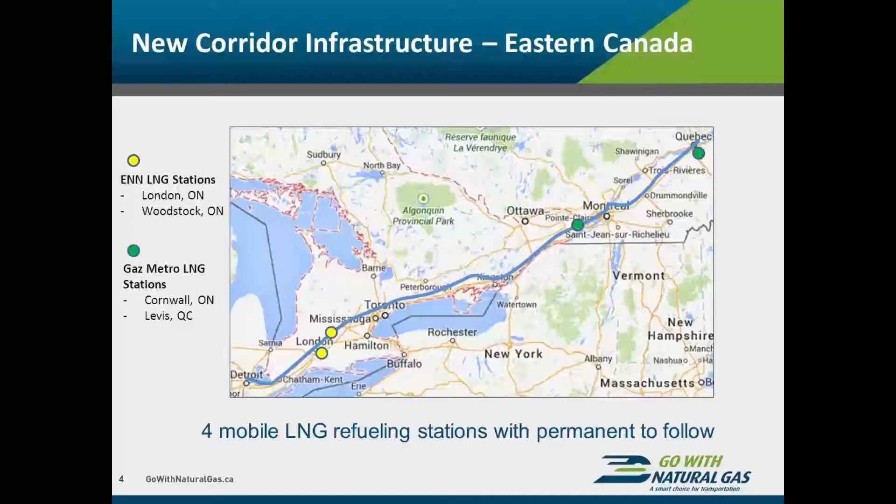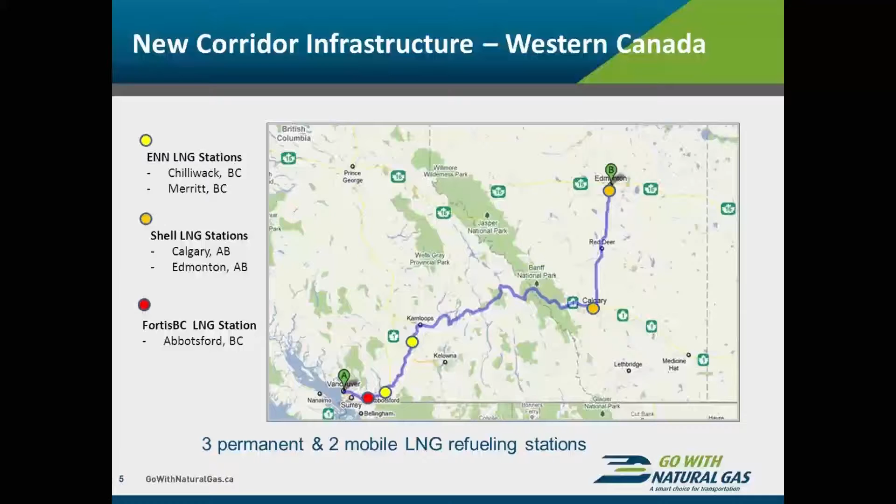More will be coming. And now moving on to western Canada, Vancouver to Edmonton, and potentially on to Fort McMurray. There are 5 stations at this point in time, a combination between permanent and mobile. Again, none of this infrastructure existed 2.5 years ago, so very exciting times. We're just at the beginning, and this is all private money going in to get this going in the market in Canada. Okay, so with that, that's just a little snapshot on what's actually going on in the market here.

For the presentation, I'm going to take you through why we're seeing this interest in Canada. Canada was an early adopter in this area going back to the 80s and 90s. Why is it coming back? Then I'll get into what are the engines and the vehicles available if you want to go in this direction, and then dive deeper on the 3 segments where we're seeing most of the activity: transit, refuse, and the highway tractor segment. We'll look at some broad adoption indicators there and also get into 3 specific fleet profiles and some of the numbers to look at the business case for those opportunities.

And then finally, I'm just going to wrap up to talk about what are some of the other elements that we're doing to really improve the system so that when fleets want to switch to natural gas, everything is ready for them to go. Once they've verified that business case, everything else is in place to help them.

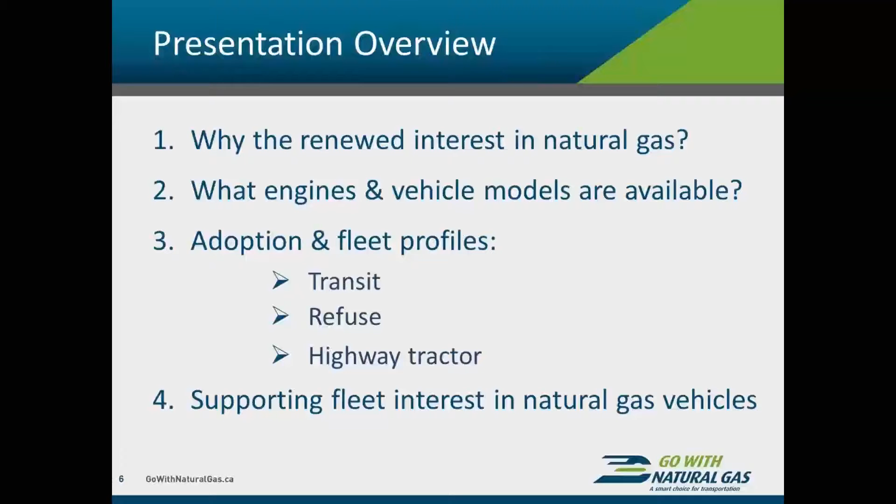So now getting into it, you've already seen this, so I'm just going to go on. I should mention that, yeah, I work for the National Trade Association here in Canada.

Okay, so let's go right to the heart of the matter here. Why has natural gas come back? Well, I think everybody probably knows this. The fundamental reason is supply. In North America, we now have more than 100 years of supply.

Demand for natural gas is the other important part of the equation. Demand in traditional markets is pretty steady, maybe a little bit of growth. The only high growth area for natural gas use in Canada is oil sands. And Canada is exporting less and less natural gas to the U.S. because the U.S. also has a tremendous natural gas resource base.

So this is a real challenge. Where is the resource going to go? There are three options here: power generation in Canada, export to Asia, and transportation. So that's an important driver, and important to understand too when we look at government interest and the increasing interest in that regard. So the resource part is critical.

Another critical part, though, is the affordability of natural gas. It's important to understand how to do the basic math. A barrel of oil has just under 6 million BTU of natural gas, 5.8 as you see in the slide here, and a barrel of oil today sells for about $93. The equivalent amount of energy when it's natural gas sells for only $23. So that's on a commodity-to-commodity basis.

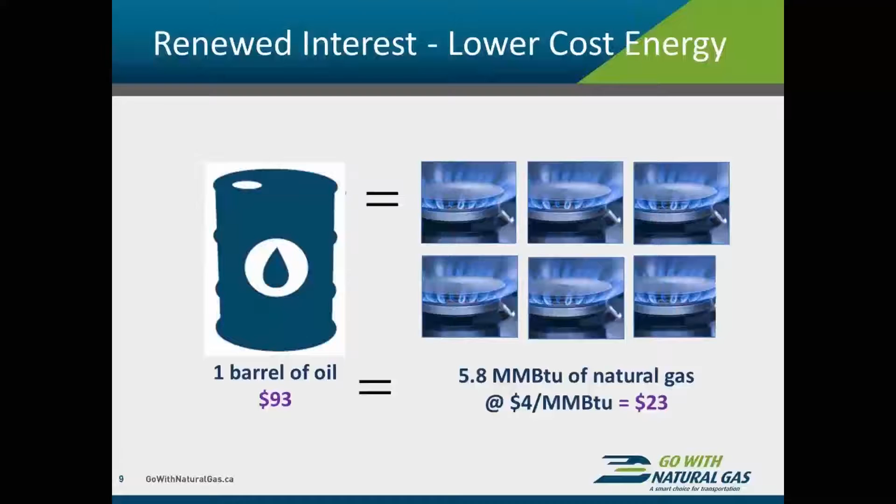But as you can appreciate, that's a very moderate price point for natural gas. And because of the resource base we're looking at, most analysts are projecting moderate pricing for natural gas looking ahead. So this is quite an exciting opportunity in North America.

The other interest for policymakers is around GHG, or carbon emissions reductions. This slide just shows for a highway tractor, what if you go to single wide tires, improve the aerodynamics, and train drivers to operate those vehicles more effectively. How do all these options compare to alternate fuels?

You see here B5, 5% biodiesel, that's the purple bar. And then you see compressed and liquefied natural gas. Well, big potential when you start to fold natural gas into the mix.

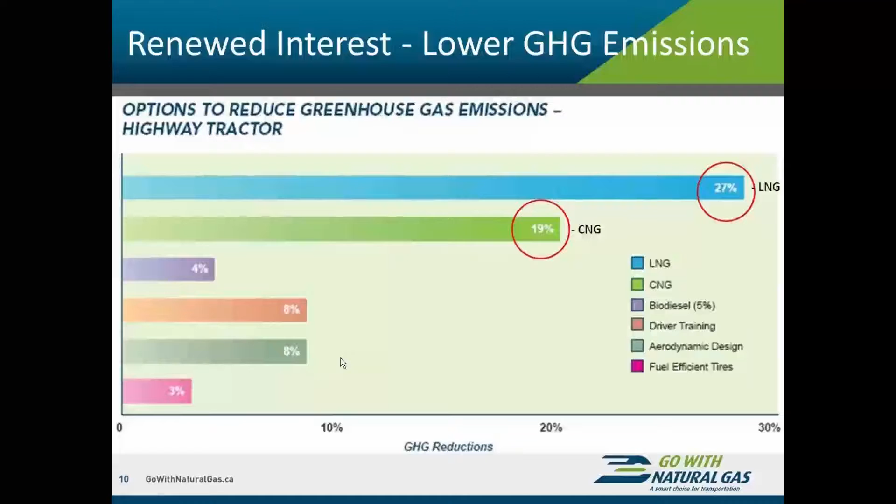And of course now Canada is harmonized with the U.S. on vehicle regulations, and we now have vehicle regulations for light and heavy that are greenhouse gas based. So as we see those regulations start to filter more and more into what vehicles the manufacturers are producing, this potentially could be another important support to make more natural gas vehicles available in the North American market.

Finally, on renewed interest is absolutely the improvement in technology. The nice thing about having a past, having some history, is that we've had time to come up the curve. We've had more than 30 years. The current engine technology for the medium and heavy truck and bus is 4th generation technology.

There's been significant improvement on fuel consumption, on power, on torque, as well as on related systems like integrated fuel systems that go onto the vehicle. And in addition, on refueling stations, tremendous improvement in the technologies here. So that's the other nice thing now about all that history. We're now really reaping the dividends in the market, and that's great news for fleets in terms of effectiveness of these technologies and the affordability of the technologies.

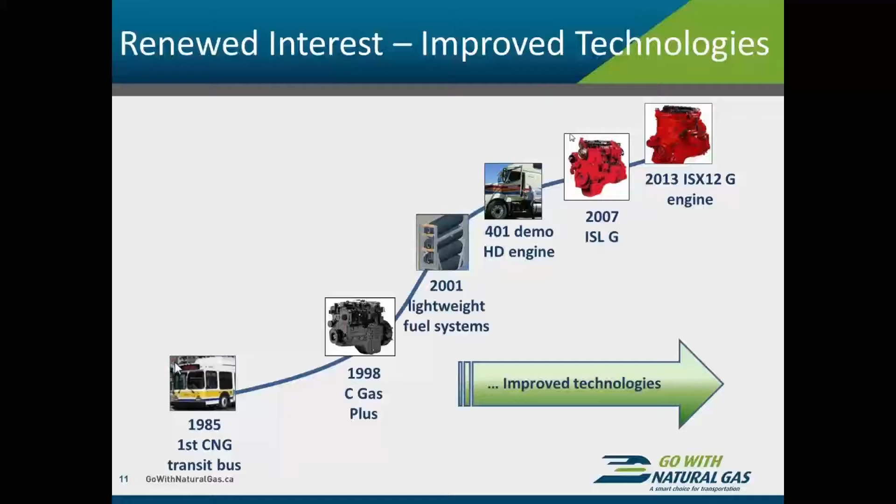Okay, I'm now going to transition into what's available and just very quickly highlight this. I think as there's been a number of changes in the engine space, so I did want to just go through this slide. You see the two engines in the upper left.

These are the current available engines from Cummins Westport. So the dedicated natural gas engines operate on CNG or LNG, the 9-liter ISL G on the left, and then the 12-liter ISX12 G. You see the horsepower range, so that takes us up to 400 horsepower, and at present that is what is available for the factory-built vehicles.

Now the good news is we do have a new product coming to the market from Volvo, and my understanding is they're going to start to take orders later this year, and that will get us above the 400 horsepower up to, I guess it's about 450, I think is what Volvo is saying here.

That's really helpful. And the other thing coming is the smaller natural gas engine, not till 2015 from Cummins Westport, but the 6.7 will be coming as well. So as with anything, it takes time to start to fill in these gaps and have a whole portfolio available. But absolutely, those investments are being made, and that's great news for fleets because it will open up more options.

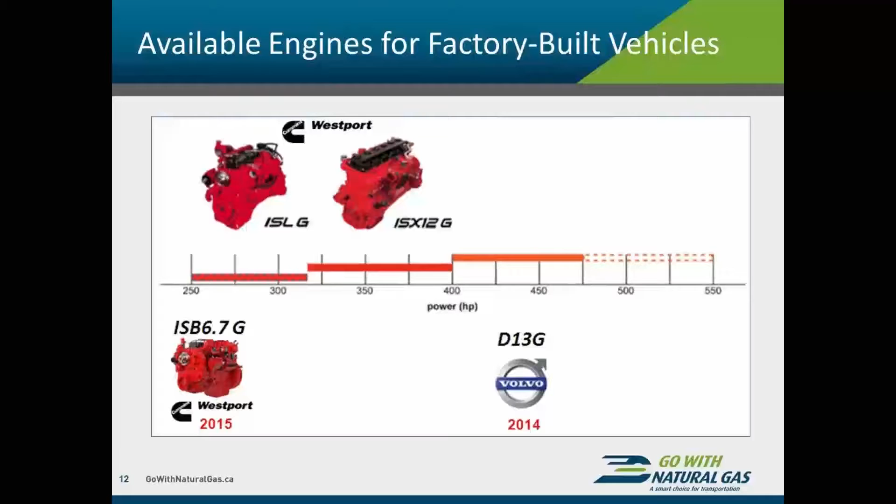As mentioned, the engines operate on either CNG or LNG. I should mention, if you go to CumminsWestport.com, find a truck or bus builder, you can also see which engine is available in which vehicle. So obviously if you're looking for the 12-liter engine, the higher horsepower product.

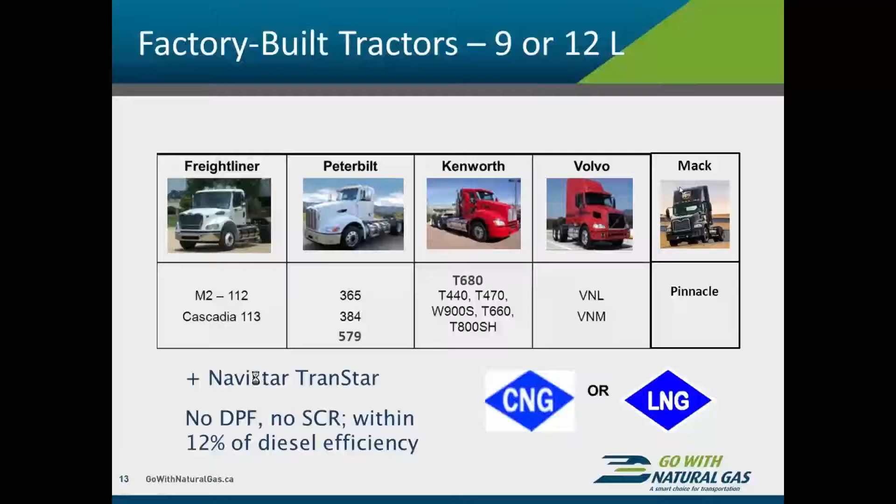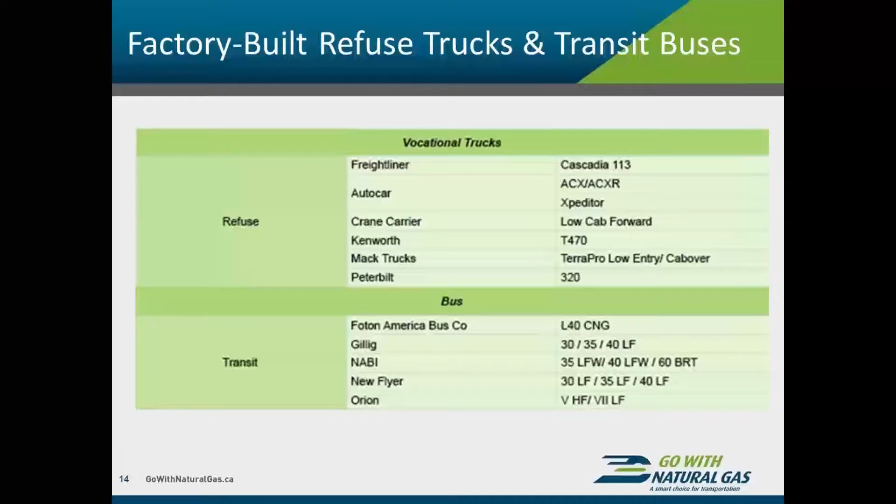Switching now, let's go deeper on the individual segments. Looking at transit, there have been a number of announcements in Canada on transit over the last 6 to 9 months. Nanaimo was first, with BC Transit moving forward with a new CNG transit bus project and a new station. Kamloops then followed, also from BC Transit. Hamilton Street Railway, I'm going to go deeper on their situation with 18 buses and a new station.

And then a big announcement just a month ago that Calgary Transit had secured federal funding to build a new gas-safe facility. Calgary has been studying natural gas for several years, but finally determined that because all their facilities were really at capacity, when they made this change, they needed to do it in parallel with a new facility. Now they've got the green light, and this will be a purpose-built facility capable of holding up to 400 CNG transit buses.

That's very big news, and to be fair, the Canadian transit industry really did a lot of the tough work on the first generation engine technology. So it's great now to see transits seeing the numbers and finding that business case to move forward and come back now that the technology has improved. We also have our two transit bus manufacturers in Canada who offer the factory-built New Flyer and Nova.

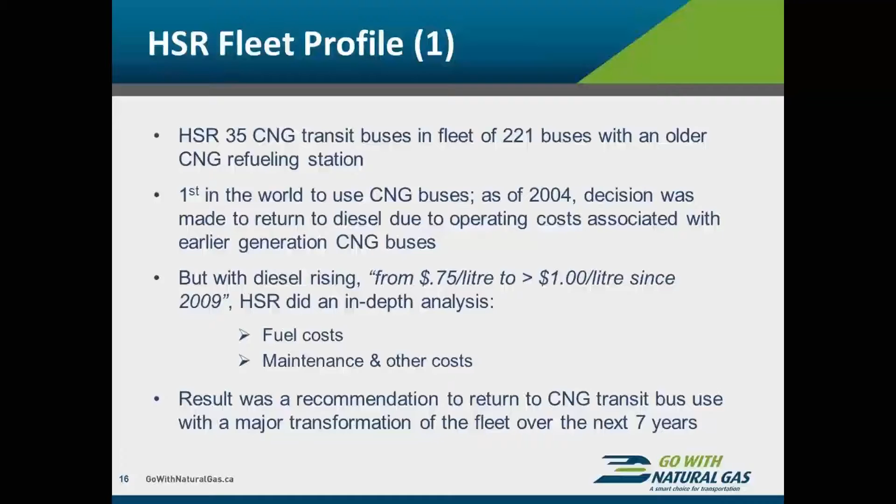The result was staff had spent a tremendous amount of time doing the analysis and basically came back to City Council recommending a full return to natural gas use, starting with their annual bus purchases, which are about 17 to 18 buses a year, buying those all as natural gas, and essentially fully transforming the fleet over about the next 7 years to a natural-gas-only fleet.

Typically, if you look at CNG pricing, the commodity itself is typically about 30 to 35%, maybe 40%, of the dispense cost, okay? And obviously with compression, there's the cost of equipment, the cost of power, etc.

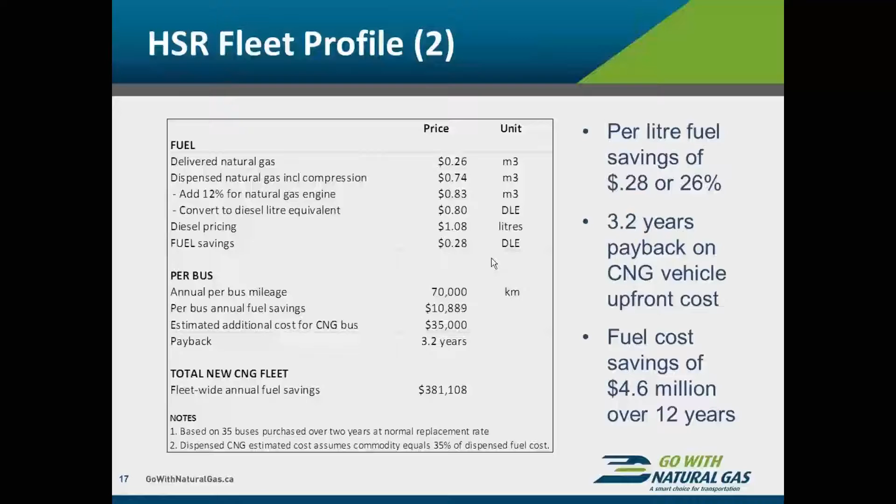There have been a lot of recent announcements, but just to give you a sense of who's operating: EBI operating in Montreal with about 50 CNG refuse trucks and continuing to grow that fleet. Emterra operating on the west coast in Surrey, British Columbia, as well as in Winnipeg, so in a very cold weather environment. Green for Life operating in both Hamilton and Orangeville, both in the Toronto area.

Waste Management up to about 50 trucks in Canada, but with other projects under review in Ottawa and the West Coast, and then Progressive Waste, both on the West Coast and in Barrie, near Toronto. So Canada essentially is starting to catch up.

Certainly in the U.S., for at least the last few years, we've seen natural gas go in at a rate of more than half of the new trucks going on the road being natural gas powered trucks. So it's great to see this movement in Canada, starting to track more toward the level of activity in the U.S.

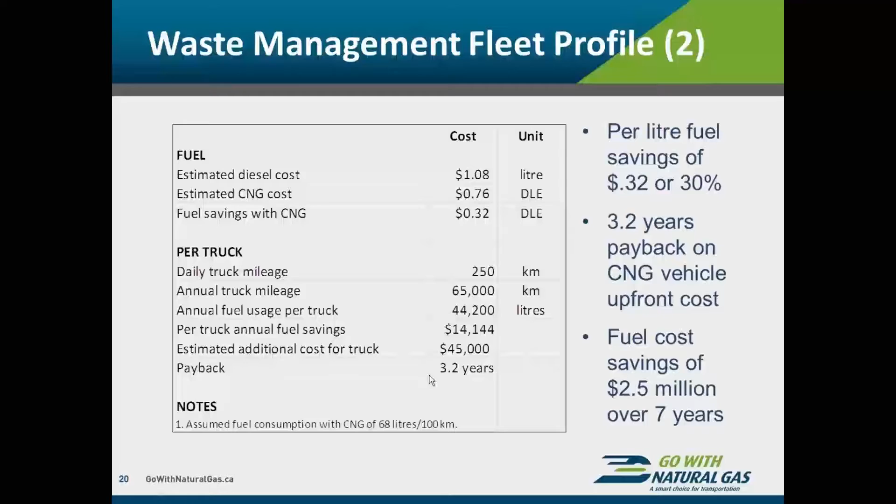All right, so with that, let's move on then to highway tractors and what's been going on in that segment. Many of you will know about the Vedder Transport project with the 50 LNG tractors operating in Abbotsford, British Columbia, one of the first in Canada and a big breakout project a few years ago. Similarly, with Robert Transport operating in eastern Canada, 120 LNG tractors, Peterbilt operating between Montreal and Mississauga.

Bison Transport also now has 15 LNG tractors in Calgary, refueling from Shell at two of their stations in Alberta. Loblaw is another one that has brought some of these tractors into their fleet, and there are other smaller-scale projects going on as well, where fleets are trying to get their hands on the vehicles, understand them, and figure out how best to integrate them, just as we've seen in the U.S. with early activity in the highway trucking area.

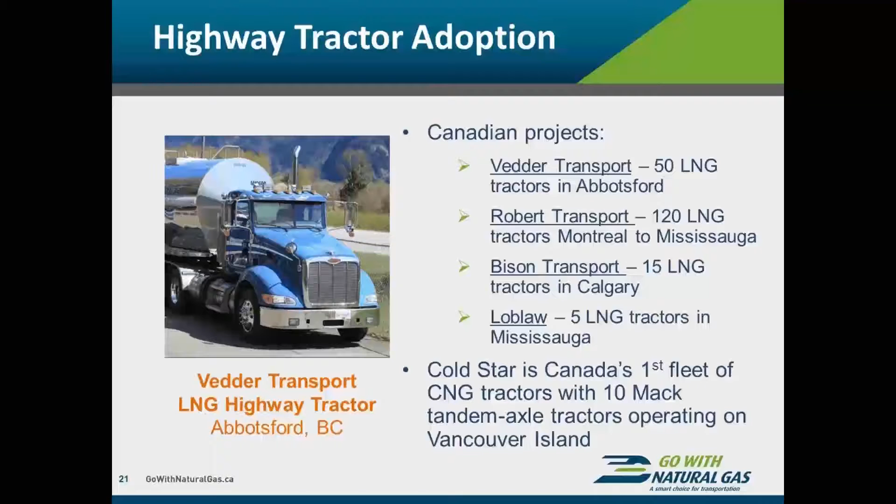I wanted to point out that of all the activity in highway trucking in Canada, up until this year, it was all LNG tractors. Now we have the first fleet in Canada using CNG for their tractor fleet—these are Mack tandem axle tractors in the Cold Star Solutions fleet. They operate on Vancouver Island, and I'm going to take you through more of the details of their adoption and why they moved in this direction.

When they looked for fuel supply, they ended up working with Fortis BC, and Fortis built a station to supply this fleet, with a fuel purchase contract in place. That station, in Langford near Victoria on the island, also has potential for other fleets to access it. We expect that as more of these stations go in, there will be more ability to access third-party infrastructure through a fuel card or card lock type setup.

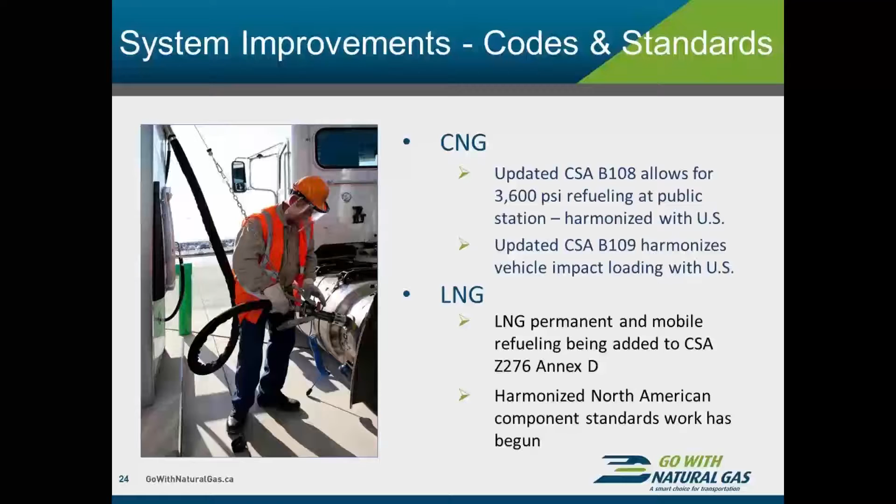On gas-safe facilities, this is an area where Canada is behind the U.S. The U.S. has a code in this area, but Canada does not. So two years ago in Canada, we developed a technical guideline—essentially a 65-page engineering-type document that identifies all the considerations you need to think about in terms of air exchanges, methane detection, venting, etc., and all the codes and standards that apply. That guideline is now available from the CNGVA at no cost, in English and French. Now that we have the guideline, the next step is to move it to code.

CSA will be creating a new committee to develop this code. They'll start with the existing technical guideline, and in Canada we have different electrical and some different building code requirements, so they'll use all of these as inputs to develop the new code, which can then ultimately be referenced in regulation. We expect the code work to start late this year or early next year, on about an 18-month timeline. That's very good news—a lot of the guideline content will migrate over to the code, giving a good starting point and more certainty.

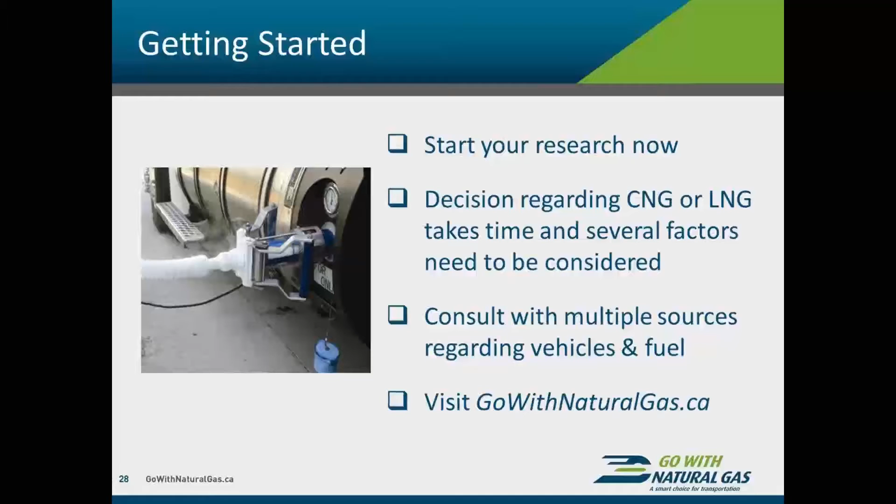So with that, the final message is: start your research now. We know it's a long timeline. If you're well into your research, that's fantastic, and if we can help facilitate going deeper, please let us know. And then, of course, there's the website and the outreach hubs. So with that, Dave, I'll turn it back to you.

Absolutely, and I'd just like to say that Alicia and the Canadian Natural Gas Vehicle Alliance have been a tremendous resource. The NGV associations - some of you have heard Stephe Yborra, Alicia's counterpart across the line - and also her counterparts around the world have been an extraordinary resource for us at IMW in our global reach. So I'd encourage everybody to take full advantage of the resources they have. We've certainly seen the research available here in this presentation, as you've seen from Stephe Yborra, so some great content there.

Now there's an additional question here, and it relates back to government support, Alicia. Is the government supportive of greater use of natural gas vehicles, and if so, what are they doing to help fleets?

Yeah, another interesting question and an important part of the system. The great news is that we're seeing increasing government engagement at the federal level to encourage greater use of natural gas in the transportation sector, and we're seeing that not just in Canada but in the U.S. as well. Many of you may have seen there was an agreement signed yesterday between Canada and the U.S., between the Energy Secretary and our Minister of Natural Resources, to identify priority areas to work on, and one of them is encouraging the use of natural gas in transportation. That's very helpful, and hopefully it will filter into more support for end users and ensure that codes, standards, and regulations are up to date, harmonized, and clear so people can implement their projects and know what they need to do to comply and move forward.